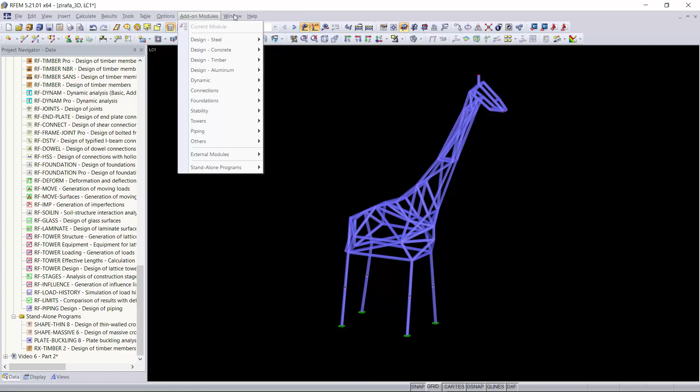Sometimes it can feel like a zoo when you're trying to figure out how to apply these uniform loads, so I'm going to get rid of this giraffe and get to our simple beam example. For this example, I will be doing 4 different distributed loads. So I'm going to create 4 different beams by simply highlighting my beam, controlling and clicking and dragging them, and this will copy anything you highlighted.

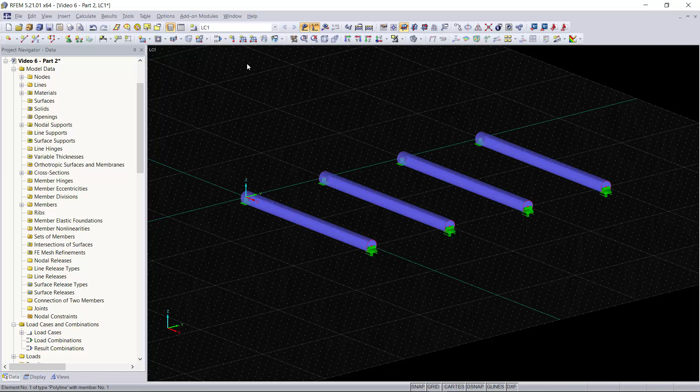For the first beam, we're going to go into our member loads, which you can do by going to new member load using the button up here. The first one we're going to be doing is a uniform load, which is the simplest one. For this one, we're just going to do a -1 kip per foot. This will be in the global Z direction. We do -1 because we want it to be a downforce and our global Z axis is pointing upwards. We'll click OK. And as you can see, we can select the beam we would like to apply this to graphically.

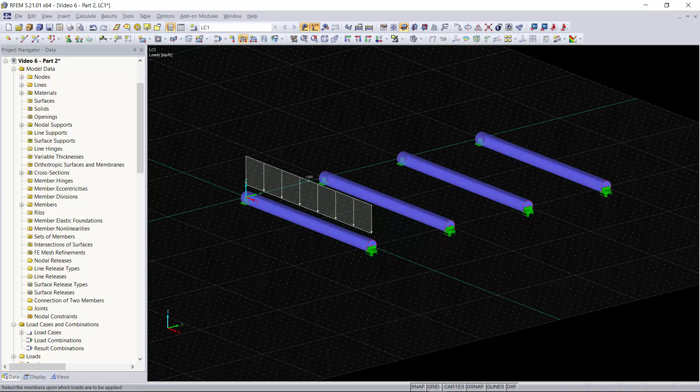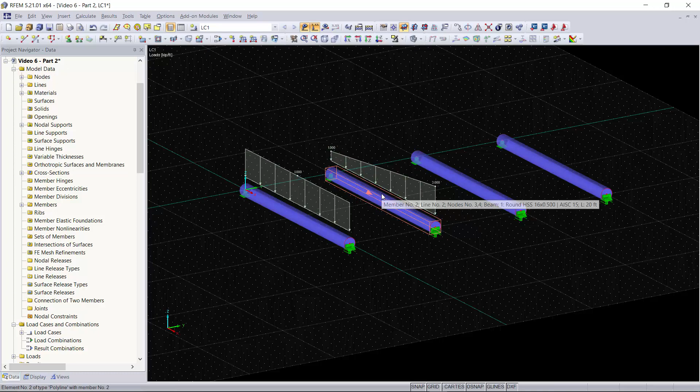For this next beam, I'll show you how to do a trapezoidal load. This is pretty simple. As you can see, the trapezoidal load graphic is up here. We have our P1, which is the starting force, and P2 is the ending force. Down here is where you can set those magnitudes. To start off, we'll just keep it at -1 and we'll end it with -3. Click OK. As you can see, I had the beam selected before I went into the dialog box, so clicking OK, it already knew which beam to apply it to, and you can see that our load was applied.

The next beam we'll be going over how to apply a tapered load, which is kind of like a trapezoidal load, but with this you can pick at what locations on the beam you would like your peaks to be. For peak 1, we'll keep it as -1. Peak 2, we'll keep it as -3 kip per foot. And here you can see the distances away from the member start, A and B. You can pick that down here. For the first peak, we'll start that at 25%, and the second peak at 75% away from the member start. We'll click OK.

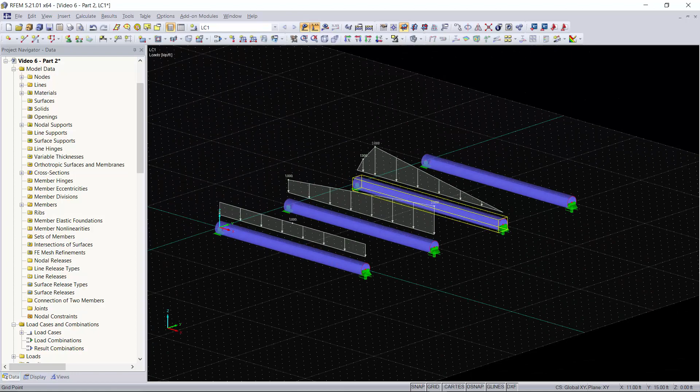And as you can see, that didn't go the way we wanted it to, so we'll double click on our load. We'll check off relative distance. We'll enter 25% and then 75%. Click OK, and there we go. 25% away, it peaks 1 kip per foot. 75% away from the member start, it peaks 3 kip per foot.

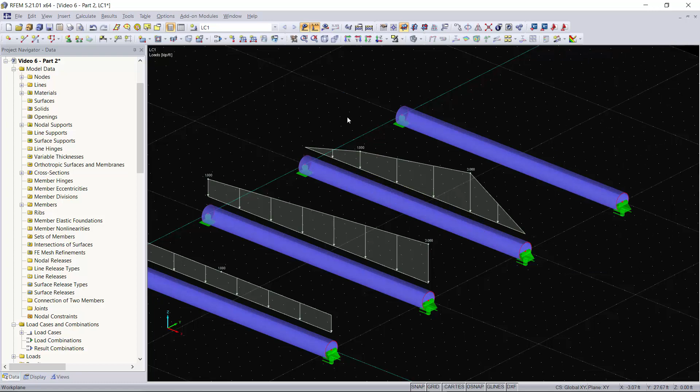If you're wondering how you know which is the member end and start, whenever you hover over a beam, you can see you have an arrow right here that'll tell you which direction you modeled the beam and which direction it's going. If you want to reverse this direction, you can simply right click on the beam, hit reverse member orientation, and now the orientation of your member was switched. I'll right click again, switch that back.

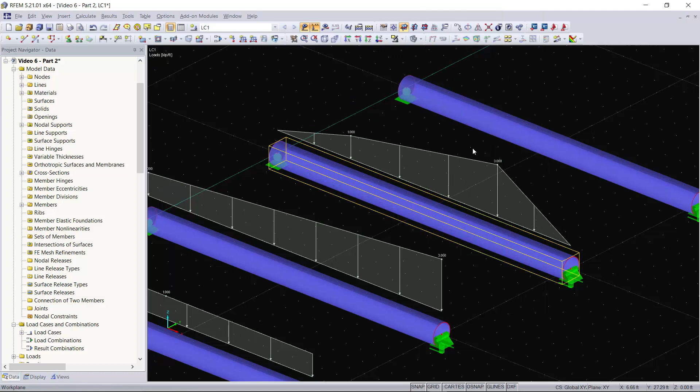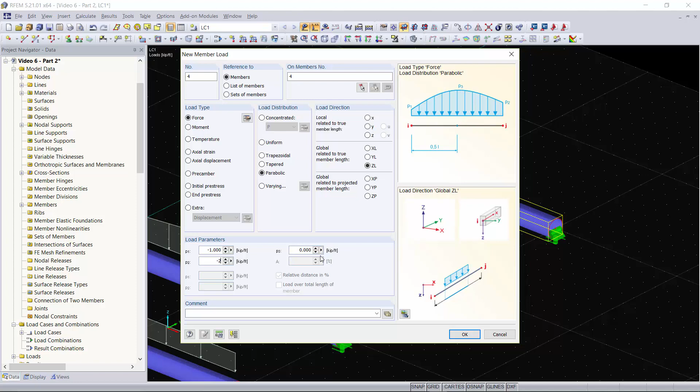For the next member load, I'm going to show you how to apply a parabolic loading, which is not linear unlike trapezoidal and tapered. This non-linear load will be a curve, and you can pick P1 and P2 for your beginning and ending magnitudes. Our beginning magnitude will be -1 and our end magnitude will be -2. And you can pick your peak magnitude, which we'll make -3. We'll click OK, and as you can see, our parabolic loading was added.

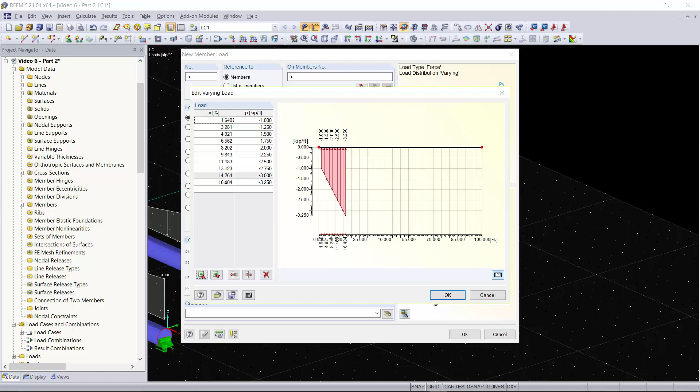Now for the last type of loading, I would like to show you how to apply a custom loading, which you can get very fancy with. We'll select our member, we'll go to member load, we'll click varying, and then next to varying you have this edit varying load button. This is where you'll define the loading you would like to apply. I'm going to highlight all of these settings, click delete. Just to keep it simple, we're going to define our load every 10%.

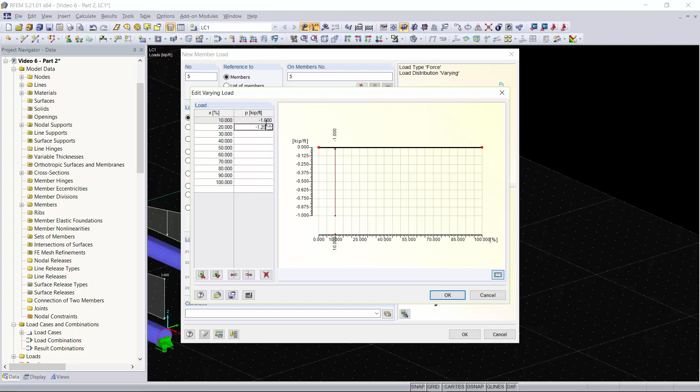So we'll start with 10, 20, 30, 40, and as you can see, when you click on a new cell, it already knows the pattern you were looking for. You can also export and import to Excel for this type of loading if you really want to get detailed with it. Every 10%, we'll start off with -1 kip, and we'll just increase that by 0.25 kip per foot every 10%. So we got -1, -1.25. We'll click OK. And now you can see our varying load was applied to our member. And we can always double click on this load, go back in, edit varying load, and change any of that if we want.